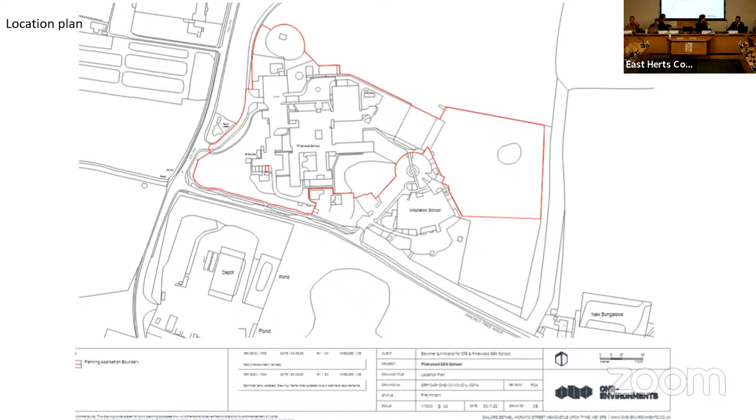Next slide, please. This is a red line image of the planning application site, which extends around Middleton Primary School to the east; to the north you have the playing fields. The site's located within the Metropolitan Greenbelt. The land to the east of the existing built form is an allocated open space covered by CFLR1 in the district plan. A public right-of-way, a bridleway, runs along Walnut Tree Walk to the south of this site. Next slide, please.

Again, this shows the outline of the existing Pinewood School, and to the right-hand side, to the east, is Middleton School. The site falls within the Ware neighbourhood plan area. Next slide, please.

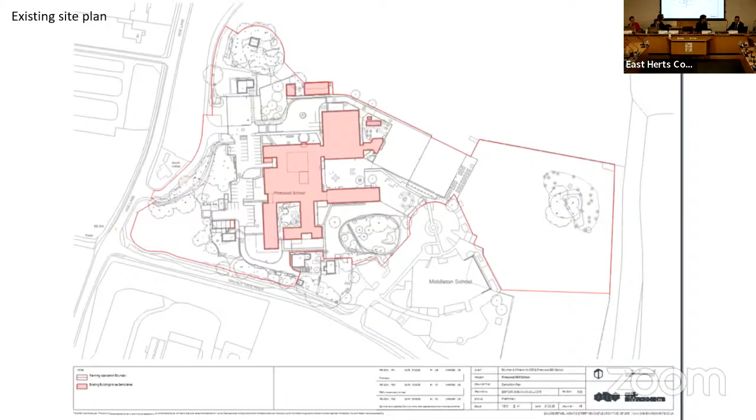Current school buildings are a mixture of single-storey and two-storey buildings in height that are in a current state of deterioration, as you will see in the following photographs. The buildings constitute a functional utilitarian design which is now outdated and coming to the end of its life.

Can you just move it for the next few photos? So these are some of the photographs that have been taken on the site, representing an up-to-date image of the site.

There are some temporary teaching facilities on site. A car parking area and hard standing occupy quite a large area of the site. There is some ad hoc landscaping within the site - some green areas, grassed areas, seating areas, play areas, etc.

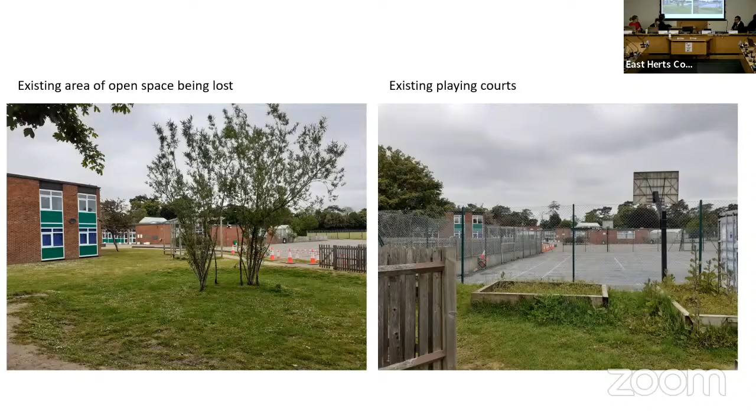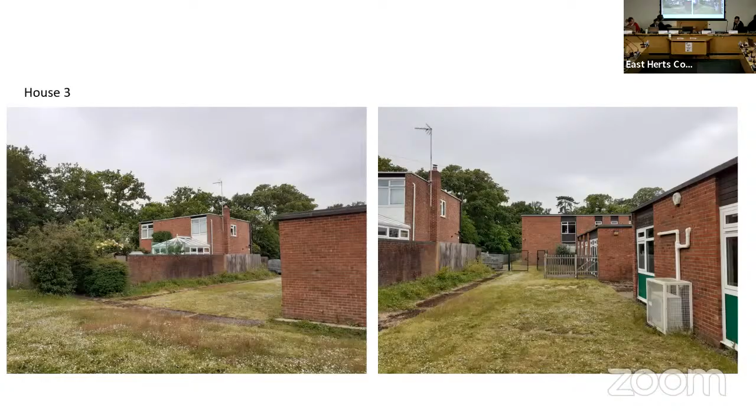The image on the right-hand side shows a clear picture of house number 3, which is in independent ownership, and houses number 1 and 2. These are accessed by the main access entrance to the site.

Proposals comprise a full application for demolition of the existing Pinewood School with a replacement school. That includes a number of structures within the site and landscaping - hard landscaping, soft landscaping - and temporary facilities.

The Department for Education have confirmed that the current school buildings do not provide facilities needed for the pupils on site. Due to an increase in pupil numbers since its construction, and due to the increase in percentage of non-ambulant pupils, the school buildings are designed to provide a modern and updated facility to support an uplift in non-ambulant SEND pupils to 25%.

These provide additional space and facilities to support these pupils. The development provides an opportunity to enhance the SEND education offer for students within the catchment area, and plans to deliver improved teaching facilities within a new teaching environment with up-to-date technology and SEND specific facilities. The school has been designed to be significantly more accessible within the site and easily accommodate larger equipment supporting movements.

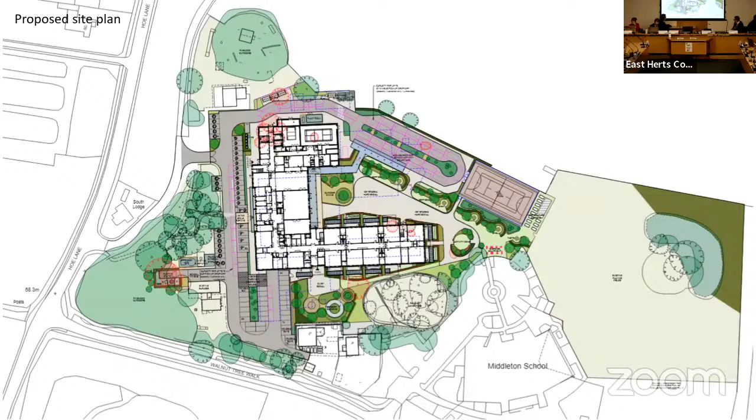The proposals, as I mentioned, do propose an improved drop-off facility within the site, which is again designed with the type of pupil in mind, so it creates a more orderly drop-off at times for the SEND students.

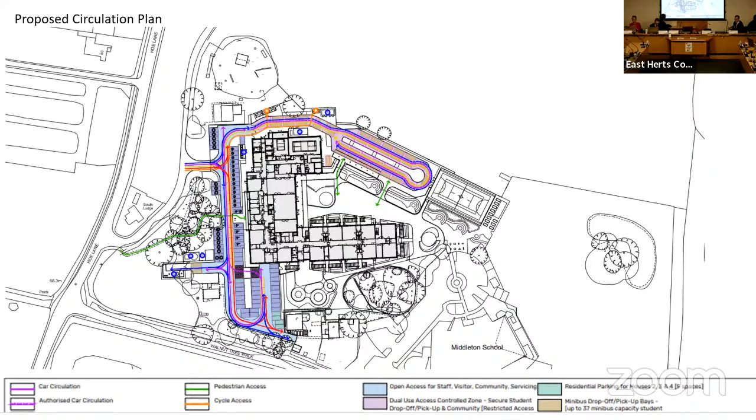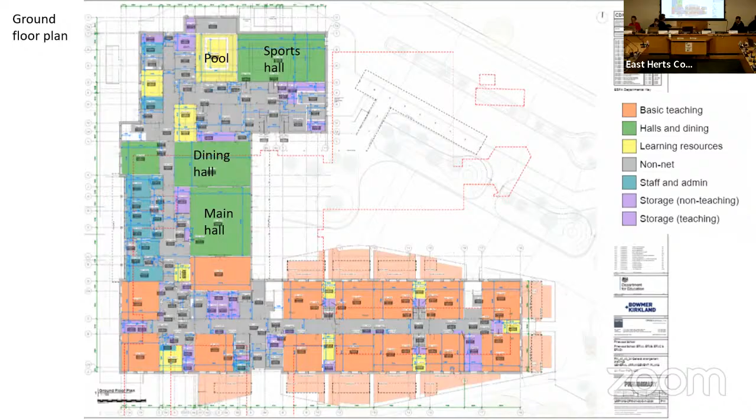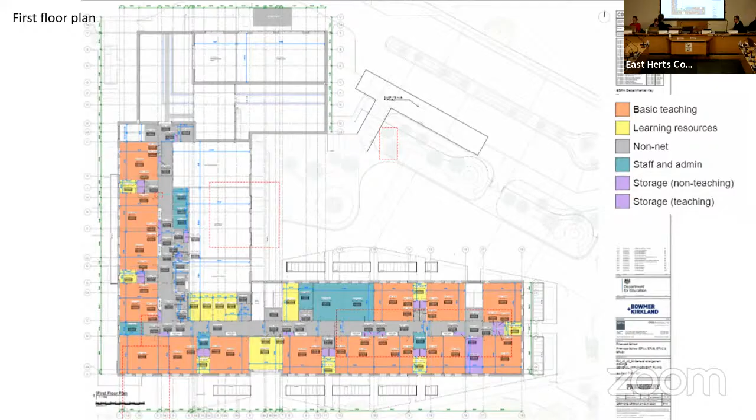This is the proposed first floor of the building. You can see the outline of the existing building in red. As you can see, it's quite a large increase in the first floor of the site, along with a different footprint.

The predominant materials are rain screen cladding in a variety of colours to soften the appearance. There is brickwork within the lower floors, and larger glazed windows at classrooms in order to get more light into the classrooms and various rooms.

There's a biosolar roof with green roofs incorporated and photovoltaic panels. The proposal also includes additional canopies outside of the ground floor classrooms, which provide external teaching space and external classrooms.

The building will achieve net zero carbon in operation at handover, and the architectural approach constitutes a fabric-first principle, which ensures that the fabric, heating, ventilation, water and lighting systems are designed to meet energy efficient standards, so they're robustly proposed.

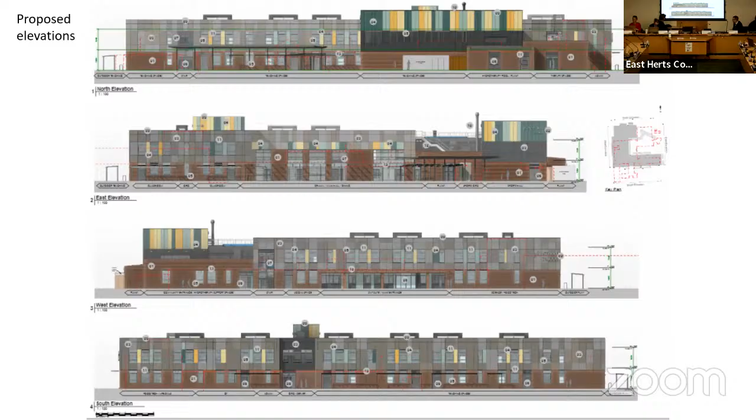It's based around a central courtyard, with more orderly spaces and so on. The applicant has put forward a case that, in their view, the school has been laid out to have a design that considers the surrounding woodland, the sports fields and the neighbouring uses.

The applicant also considers that it provides a different learning landscape with larger and additional classrooms, wider corridors, external classrooms and dual use activity zones.

The applicant is the Department for Education, and they will provide these schools based upon Department for Education standards. What we're here to consider today is the development against the planning standard, so there are slightly different standards in play. What we're looking at today is the planning case, but it's also important to note these are put forward for specific DfE standards.

The proposal includes a new central courtyard, an increase in biodiversity on the site of 17.7%, biodiversity net gains, the biosolar roof, green roof and PV panels that I mentioned. The proposals include the retention of habitat and woodland areas.

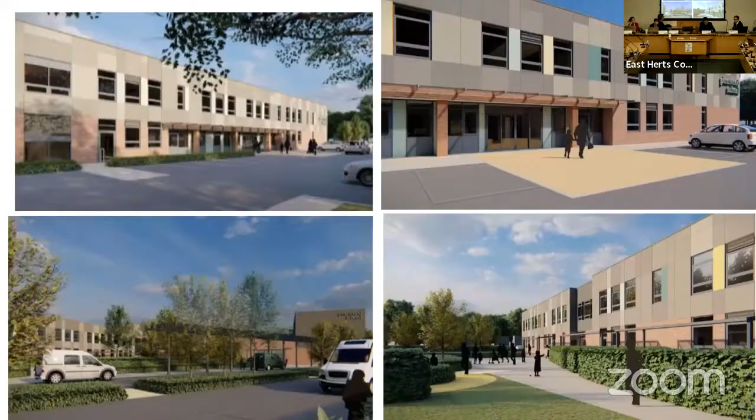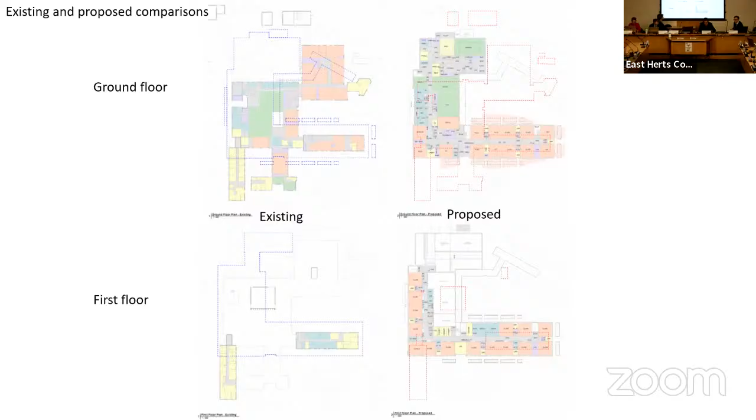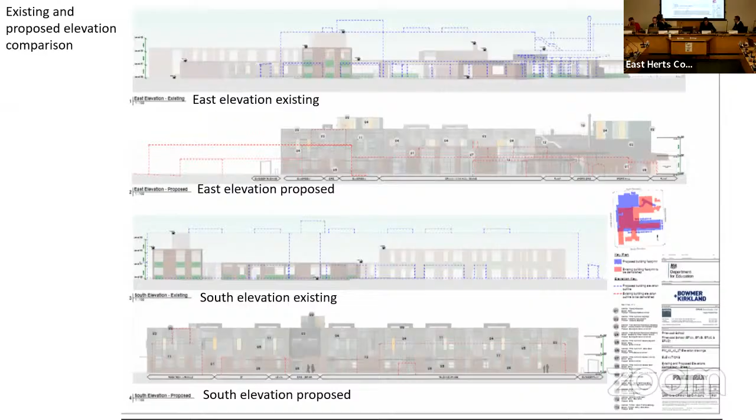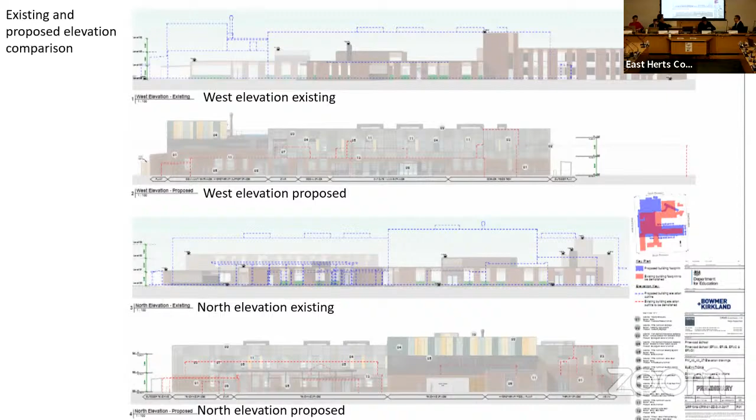And these represent the western and the northern elevations, again with a similar comparison. Officers requested these drawings throughout the consideration of the planning application because we were seeking to assess the difference of scale on the site, and that was an important factor in how we presented the planning assessment. Next slide, please.

There are a few trees that are removed: one category A tree, two category B trees, and a number of low quality trees which are being felled. However, there is no overall unacceptable adverse arboricultural impact, and the trees and landscape officer raises no objection to the proposals.

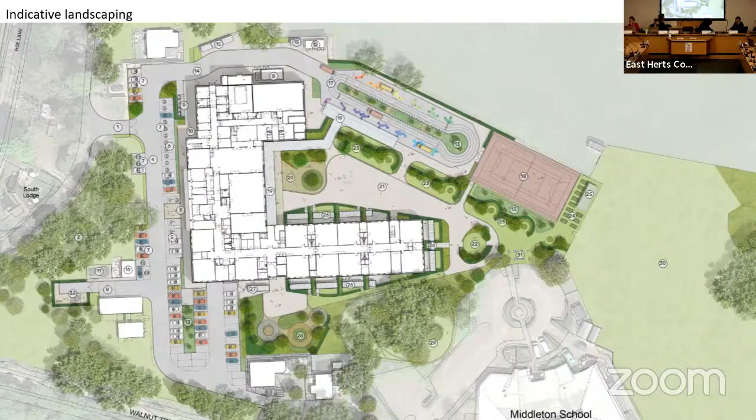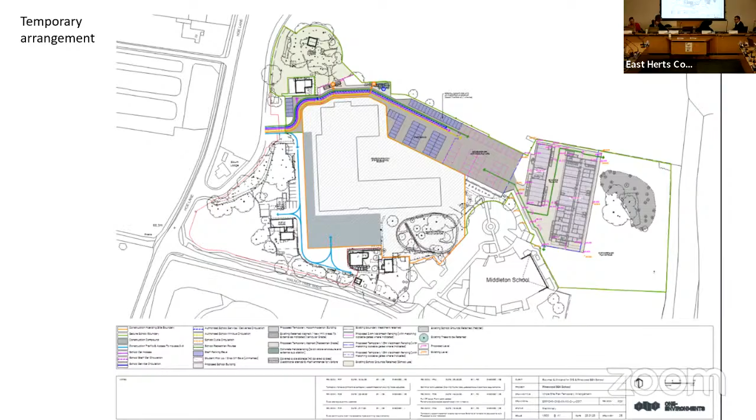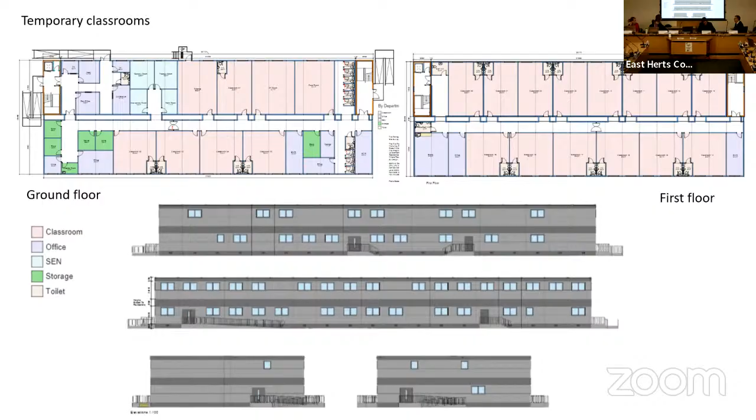Again, this just shows you the layout of the temporary classrooms. These are very much a functional design that are meant to support the lifetime of the temporary school when it's in situ.

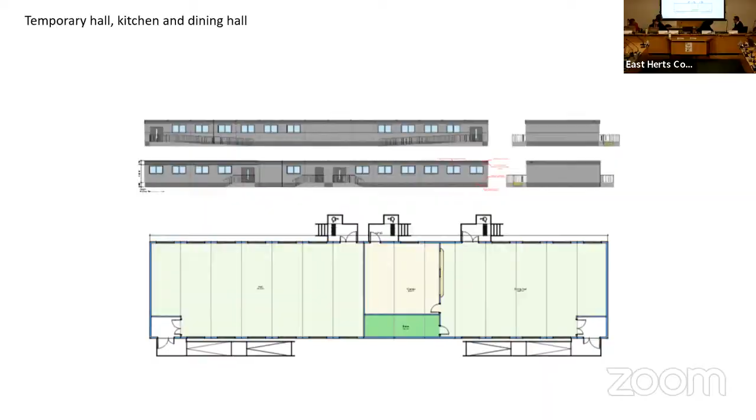In terms of the principle of development, officers consider that it complies with the district plan policy CFLR 10, which represents proposals for new and improved educational facilities. It also complies with NPPF paragraph 95, which requires a sufficient choice of school places available to meet the needs of new communities.

With regard to the very special circumstances, the detailed officer report before members concludes that the proposed development comprises a much larger but significantly improved school building with associated provisions, and as such we consider it inappropriate development within the green belt. However, officers also consider that there are a number of very special circumstances which have been demonstrated to our satisfaction. These are set out in the officer report in detail, and they indicate that the development is acceptable in planning terms and therefore compliant with the Greenbelt guidance set out in the National Planning Policy Framework, along with the Council's District Plan Policy GBR1.

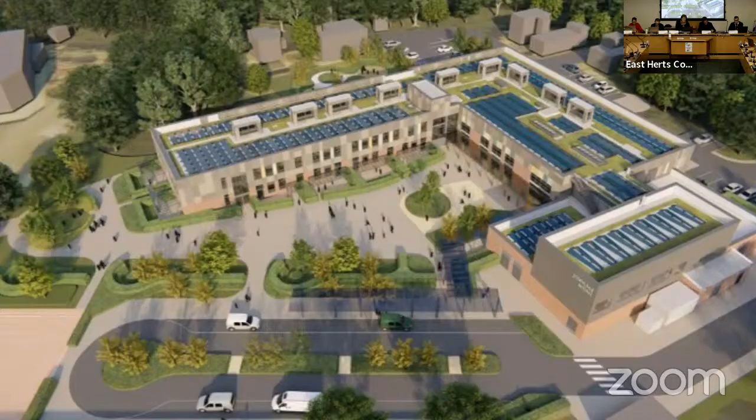Just a summary of those very special circumstances, which we need to touch on briefly. The first is that there is a clear and established need for the development, in this case to meet the county-wide provision for SEND secondary school places. It must be provided in this location to address the needs in the wider area.

The second circumstance is that the existing school is outdated and unsuitable for refurbishment, requiring comprehensive redevelopment and reprovision. The third circumstance is that the proposed development provides some additional community benefit by virtue of the new sports facilities that will be accessible to the local community after school hours, through a community use agreement which is to be conditioned.

The final very special circumstance is that there are no alternative sites considered suitable to accommodate the development. A combination of those very special circumstances, in the officer's view, represents very special circumstances, and that constitutes a very significant material consideration in how this is balanced and how we've come to an assessment on the application. So notwithstanding the building being larger, there are very special circumstances that weigh heavily in favour of supporting the proposals.

In design terms, officers consider that the proposed building and associated structures are of an acceptable standard of design, constituting a significant improvement to the current buildings on the site. The resulting design and architectural form is considered acceptable, notwithstanding the additional built form on the site. These are typical of a modern school building and are compatible with the educational character of this site and the surrounding area, which includes other schools.